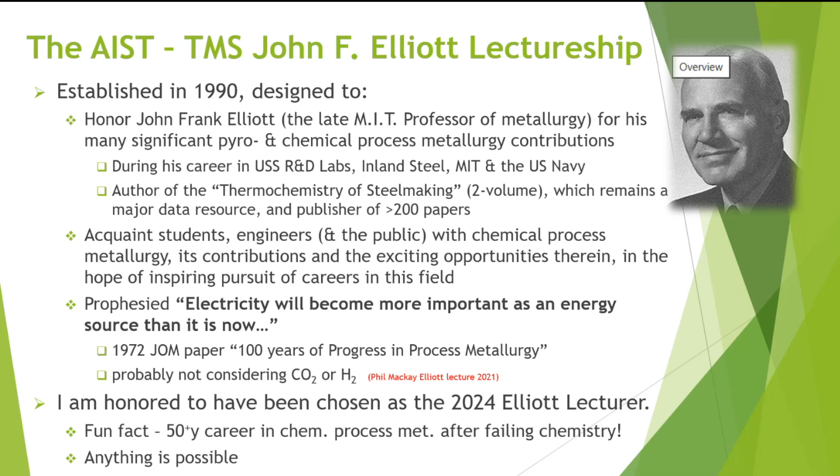So why the Green Steel Revolution? My definition is zero emissions steelmaking using fossil-free energy sources. And of course, the zero emissions ironmaking is the most crucial for the greenhouse gases, as I will show you. But at this point in time, it's not cost competitive with fossil-based.

So why the Green Steel Revolution? In 2015, the plan was to convert 800-year-old blast furnace BOF technology to the 60-year-old EAF technology and make some major changes in the modus operandi there. So carbon-free electricity, green carbon and consumables, and hydrogen direct reduced iron as a charge material.

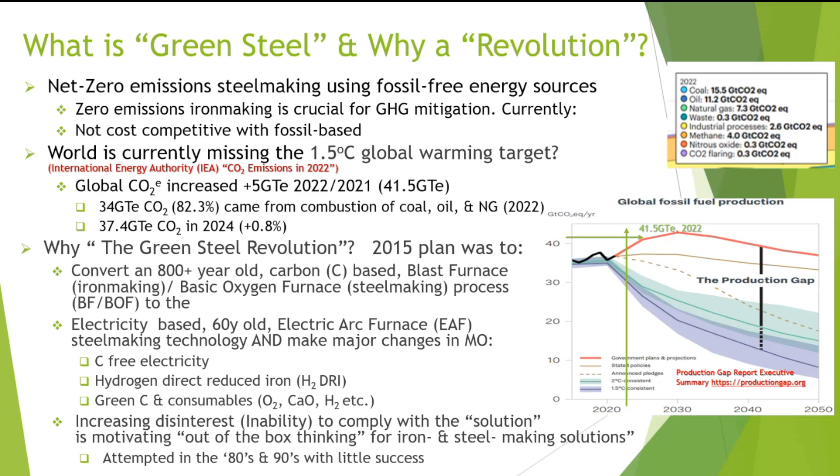But as everyone's seen, there's increasing disinterest or inability to comply with this solution. And it's motivating out-of-the-box thinking and new iron and steelmaking research. But it's valuable to note that in 1980 through 90, there was a lot of work done on this with little success. I'm not going through these, but just to demonstrate blast furnace smelting, reduction, direct reduction, and scrap recycling.

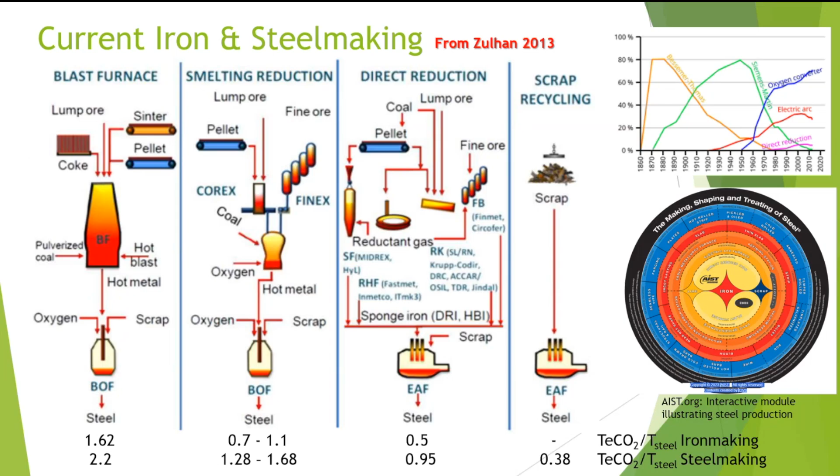Carbon dependence in both the processes shown here. I'm not going through all the calculations, but obviously with the blast furnace, currently there's no opportunity to completely replace the coke used. In the electric furnace, we have carbon used for chemical energy and foamy slag reactions. And of course, foamy slag has become very significant in processing over the years because of the reduction in heat loss, increased chemical activity, and the yield and productivity effects from it.

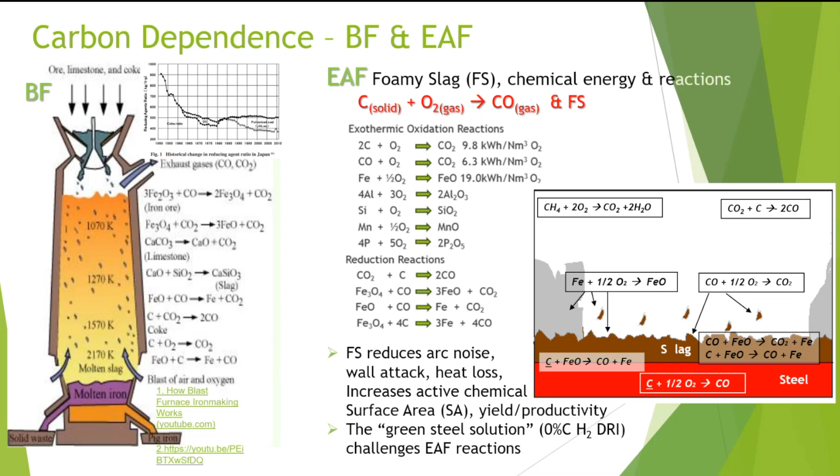And India is the second largest at 57% EAF steelmaking. And strangely enough, the USA is one of the largest emitters, but not specifically from the steel industry, because we are about 74% EAF steelmaking now. Fun fact, Canadian fires were the fourth largest emitter in 2023, emitting 647 million tons of CO2.

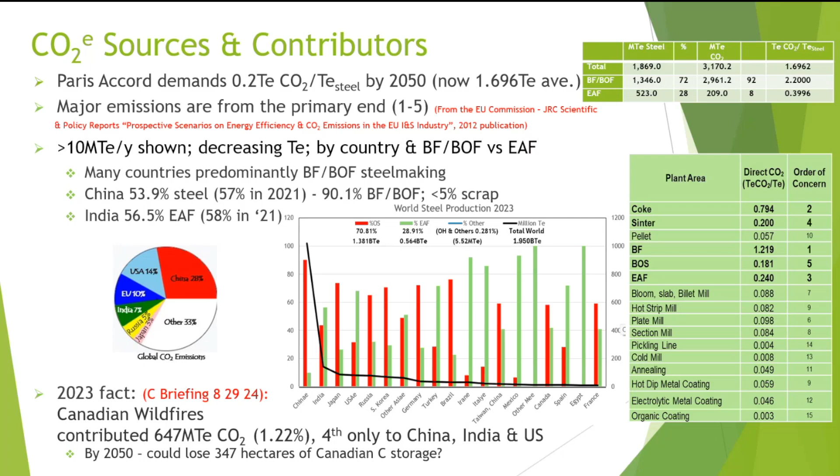So if we look at the International Energy Authority's vision and green challenges, of which there are 9, technically the 95% hydrogen DRI EAFs they expect to have online by 2070 are technically feasible, but there are major challenges which I will go through. The challenges are promoting research, which are from lab scale TRL3 up to demonstration plants at 7, some of which have become viable in less than 3 or 4 years. It is the most exciting era since the 60s when continuous casting was developed.

And the first of the 9 challenges is what I call the build rates. I believe they're unreachable. The future is predicated on the ability of hydrogen, energy, carbon, and better qualified scrap being available. And if you look at the numbers, in the 50 years since DRI began, there was only 2 million tons a year of DRI plants built as an average.

By 2050, IEA is projecting we'll need 411 million tons of DRI, of which 213 million will be hydrogen-based. And that's going to require 11.5 million tons of hydrogen per year, 692 terawatts, 1,240 20-megawatt PEMs, and 810 electric arc furnaces. And that's an enormous number of plants to be built to comply.

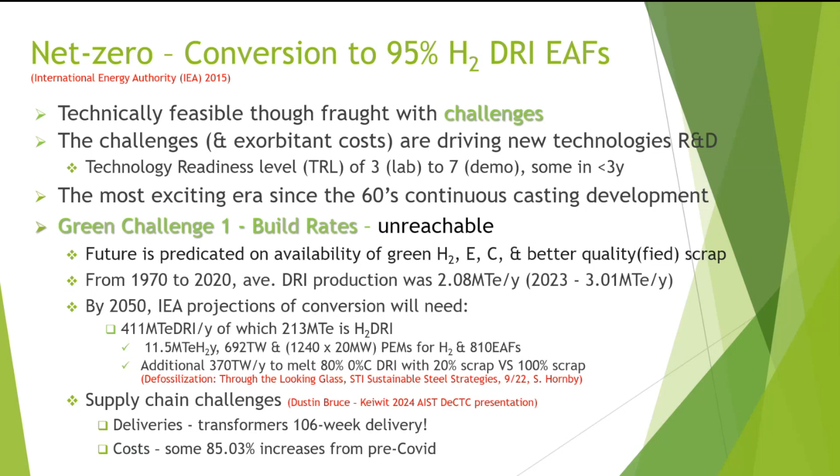Additional to that, as I will show you, zero carbon DRI that's produced with hydrogen, even if you look at the 80-20 running of DRI with scrap, is going to require 370 additional terawatts for melting. And we've got supply chain challenges now, which have occurred since COVID. Transformer deliveries are 106 weeks, for example, and some of the costs are up 85 to 100% now.

Another issue with hydrogen is the production efficiency. Currently, the processes that are out there require between 27 and 65% more energy than the basic 39 kilowatt-hours per kilogram of hydrogen. There are some projects ongoing. There's a plasmalysis jet loop ammonia stripping process that says they will be able to do 8 kilowatt-hours per kilogram, and they're taking that from wastewater and manure.

There's a next process in Australia with RMIT, and they're integrating sound waves with the existing electrolyzer processes and getting 14 times the production rate. And there's another company called Utility that's got H2Gen, and their hydrogen production is coming from water, but they're using blast furnace gases as the heat rather than electrical energy. They're using it as an electrochemical heat source to allow the hydrogen production. And they're able to concentrate the CO2 more efficiently for use elsewhere.

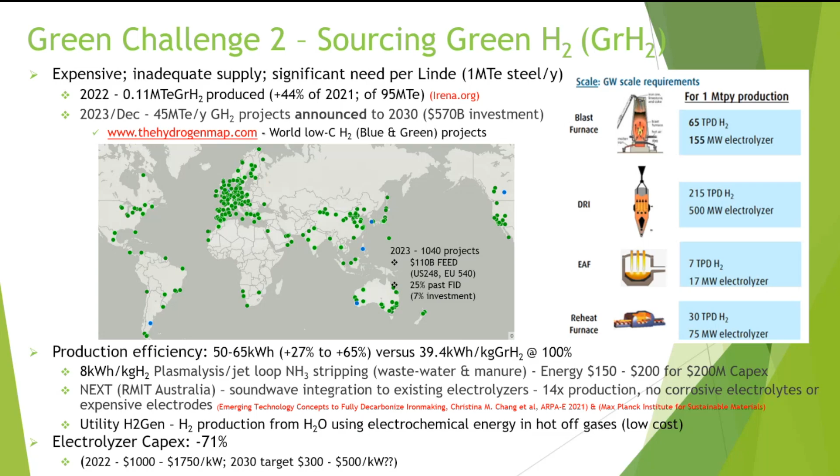We basically have not enough renewable energy at the right price. We need a drop of at least 50%, and even more in some areas in the world. Renewable energy in 2022 was 29%, which was an increase of only 1%. China is leading the way.

Capacity adds in 2023 were 0.5 terawatt and 0.6 in 2024. And if you look at energy use being 67% efficient, to produce 500 million tons of hydrogen is going to need 19% of the total world energy requirements. Hydrogen was anticipated to be an energy source in general for the future, but now only 2 to 3% is going to be used by 2050.

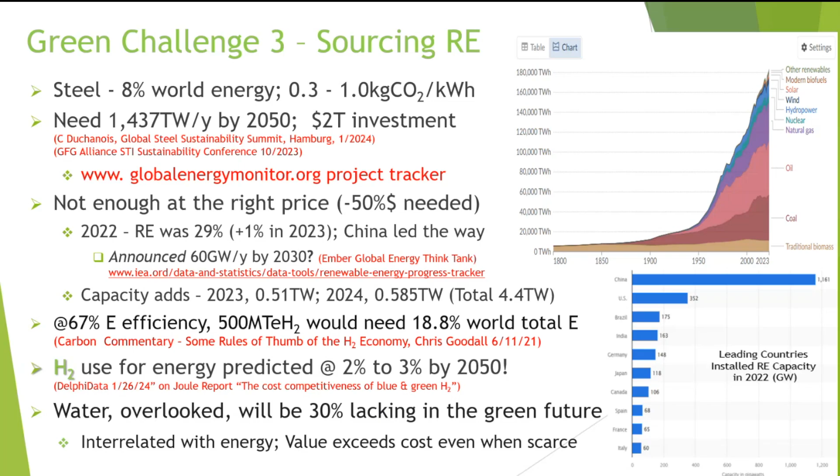Challenge number 4 is sourcing carbon. Historically, we produced iron by a renewable process, but in the 20th century we went to electricity and coal, but when energy became 20% of the OPEX, it forced minimization. There's some numbers there of how the best run furnaces and systems operate.

Obviously, blast furnace coke currently can't be replaced because they need it for bed support. Kobe Steel has the record at 239 kilograms per ton of hot metal. And one of the other issues is replacing the carbon in an EAF. Currently, the average is about 50% efficient, and I'm saying efficiency by combustion definition. If you're injecting, it's 50%. If you have it as an in situ carbon in either pig iron or DRI, it's 95% or more.

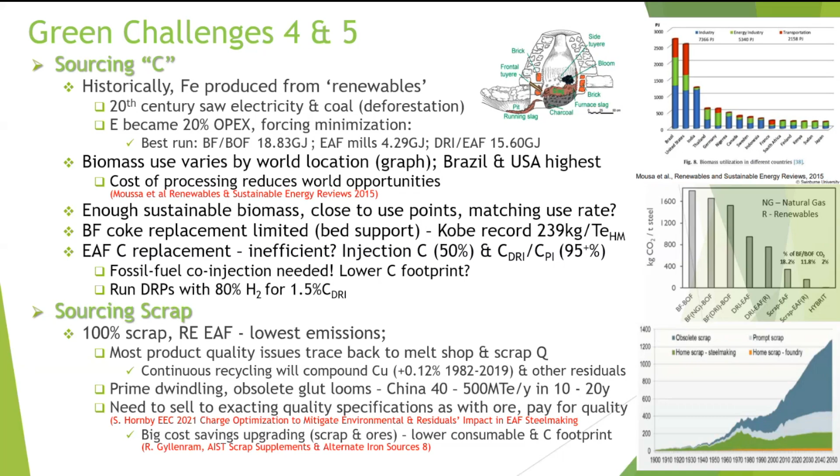The sixth challenge is the zero carbon hydrogen DRI in the EAF. You can see from the top chart that only 55% in this particular case has come from electricity. In terms of energy, 23% is coming from carbon oxidation. Carbon, as I said earlier, promotes the foamy slag. And with that comes stirring of the melt, increased heat transfer. And the carbon in the DRI currently reduces the FeO, both in the DRI and in the slag. And it also has the benefit of no ash, no volatiles.

If we have zero carbon in the DRI or inefficient carbon use, we're going to end up with increased cost and lower productivity because there's going to be more gangue in the system. We're going to have higher kilowatts, higher meltdown and tap times, higher refractory and electrode wear, lower yield, higher temperature and melt with the lower carbons, and more FeO in the slag.

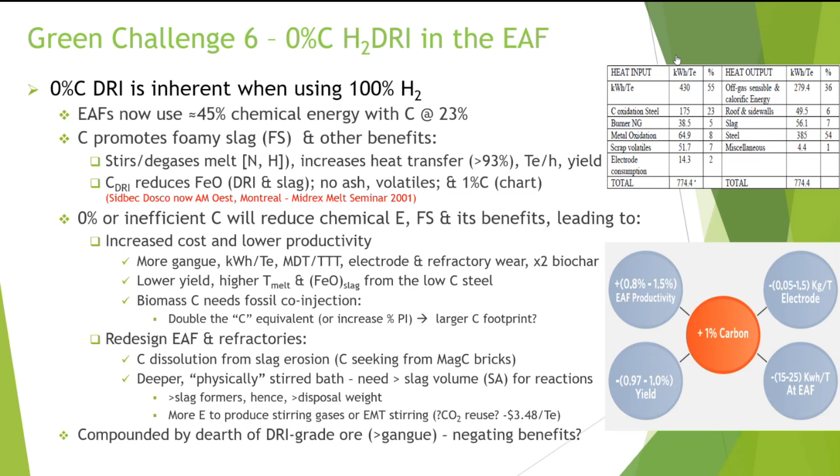So the seventh challenge is sourcing the DRI grade ore. And by that, I mean the DRI plants can basically handle any of the ore that's thrown at it. But to process that DRI in an EAF, we need to have more than 67% iron containing ore.

The quality of the ore around the world is deteriorating. We're already seeing a 2% drop in iron content. Silica and alumina are increasing by 2%, and the phosphorus increased by about 0.02%. 35% of the ore comes from Australia, and the Pilbara ores that they have there are difficult and costly to upgrade. They're doing a lot of work on it.

But currently the thought process is, and not just for Pilbara, but with the lower grade, weaker ores, that we redirect the DRI into a melter, so a submerged arc furnace, basically an ESF, and then put it to a BOF or an EAF as hot metal or as pig iron.

There's new technology for the lower grade ores. Electra is producing iron from 30 to 35% iron containing ores at 60 degrees centigrade, and that's being sponsored by Nucor. There's a process out of Australia I'll go into a little bit more later, which is producing DRI with hydrogen from fines. And Swinburne University in Australia, along with CSIRO, are working on this highly reducible flux lime magnetite pellet, and that's allowing the process to be basically constrained a little bit, and two process steps are being removed.

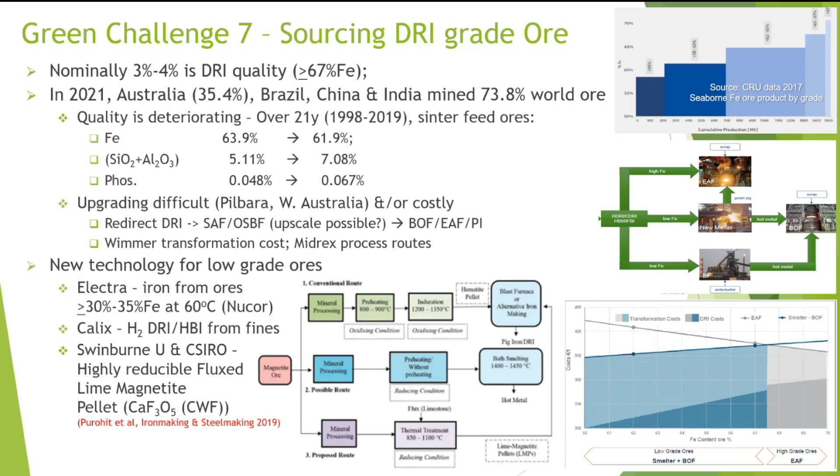Number 8 challenge is the availability of carbon capture use or storage. It's substantially below net zero requirements currently, and yes, it can address the 54% of the hard to abate emissions, but currently 35 plants in the world only capture 45 million tons of CO2, which is 0.12% of the world's requirements. And the new CCUs that were announced last year that should be operating by 2030 only increased that 0.6%.

So whilst they've been slated as a catch-all for solutions, there was an interesting article last year from Sandbag that says basically CCUs don't make sense economically, environmentally, or energy speaking. And they said that the effectiveness and relevance basically varies depending on the application. And they were suggesting it would be more appropriate for the Europeans that they were referring to to look at the direct reduction plants and other solutions rather than spending money on CCU research.

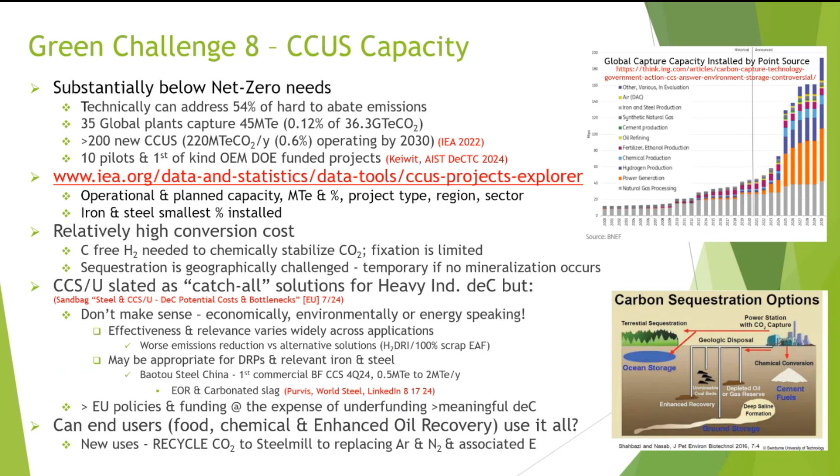The numbers here were taken from May last year, but the USA was producing hot band at 839, Western Europe at 680. The world export number was 580 and China was at 448. So it's necessary, of course, to levy border and import or black steel taxes to non-compliant nations as we move forward. And basically, the predicted carbon tax in Europe, unfortunately, is stipulating that financially the carbon tax needs to be over $300 per ton before it becomes financially viable to consider moving forward with a huge green steel conversion.

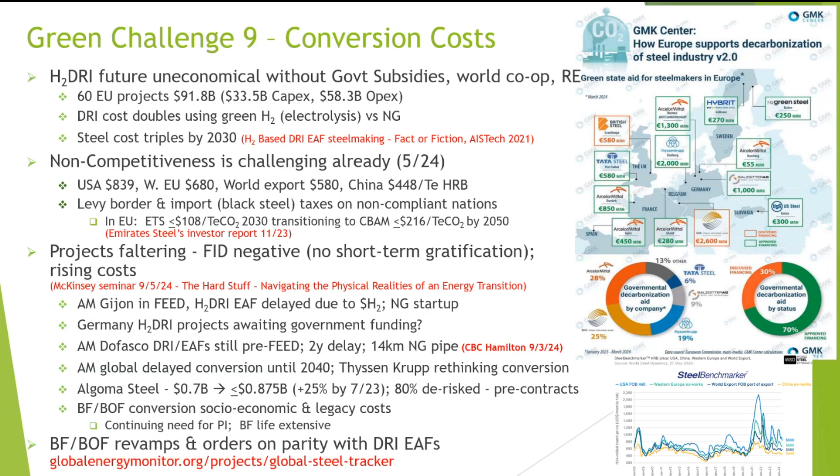Projects are faltering. The final investment decisions are negative in a lot of cases, I think basically because there's no short-term gratification. Costs are rising. There are some projects listed there that are delayed, and we all know that ArcelorMittal has delayed a lot of their projects by up to 10 years. Some of them have already been cancelled, and I'll show you a little bit later that the number of blast furnace operations is increasing significantly. So my thought is that we need to look at revamping the blast furnace BOF process and work on the ability to upgrade that as we move forward.

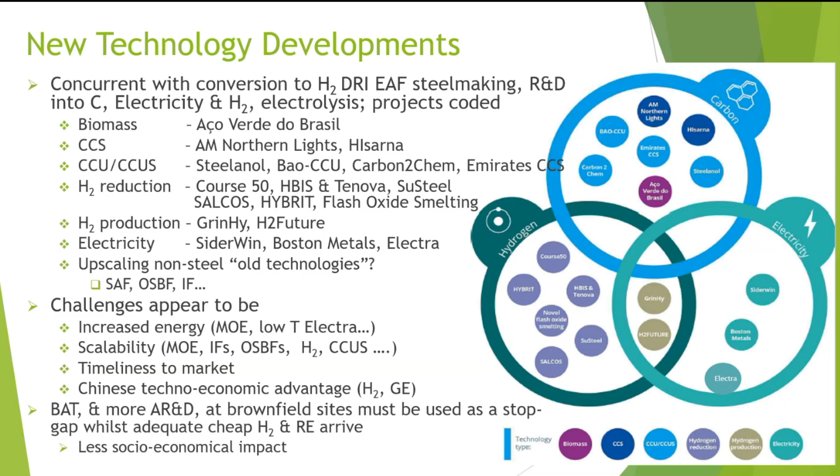So new technology developments, basically looking at biomass, CCUS, hydrogen reduction and production, electricity, and scaling what we call non-steel old technologies such as the SAF and the OSBFs. There are 3 processes in the world running with iron making, none of which are, I believe, running to full efficiency or capacity. Challenges for everything appear to be increased energy, scalability, timeliness to market, and the Chinese techno-economic advantages. So again, best available technology and more R&D at brownfield sites really should be a must moving forward as a stopgap.

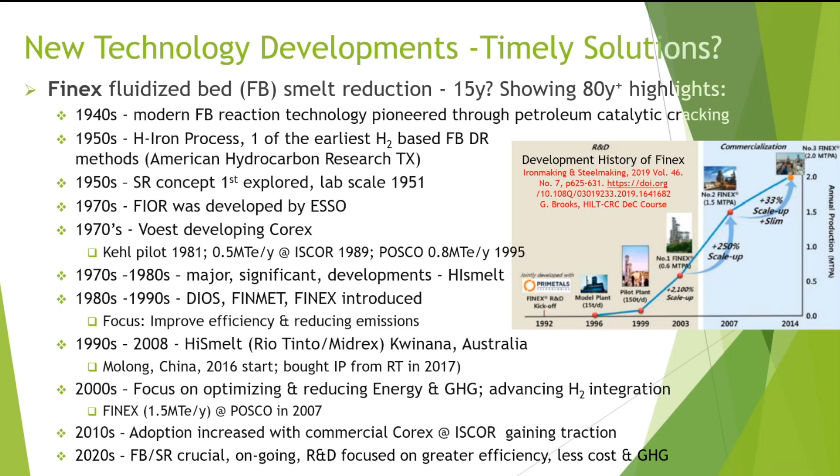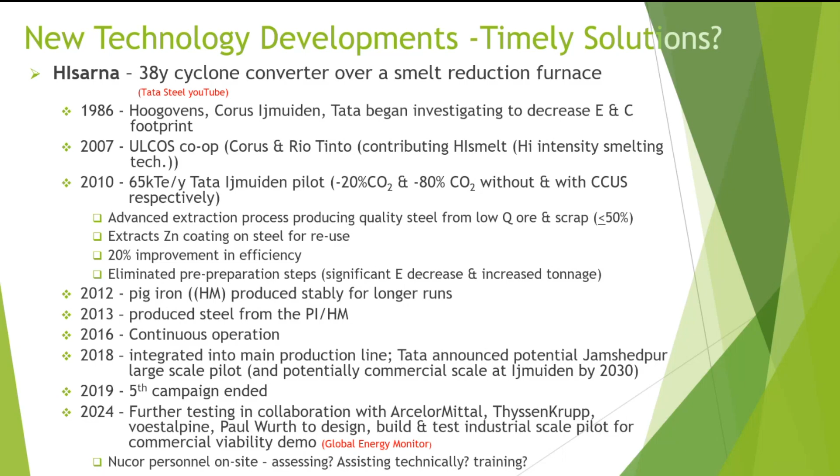Timely solutions, this is just an example I put out here. The blue area was the claim a few months ago saying we've developed Finex in 15 years. Well, if you look at the data, it's actually more than 80 years since they started working on that. And the second example I've got in here is HIsarna. This is a 38-year development of the cyclone converter with a smelt reduction furnace. Research is still going on.

So some of the new technologies: the electric smelting furnace is predicted to be capable of taking the excess lean ores and the unsuitable DRI. However, they need to upscale it. Currently, they're 1.1 and 1.4 million tons a year, whether they're circular or rectangular. But they need to optimize power intensity, sustainable renewable energy use, and the electrodes, which are currently carbon, and integration of that into a normal large plant won't be a problem.

BlueScope, BHP, and Rio Tinto are working on an ESF for the Pilbara ores. It's been announced, but they're doing the studies currently. And it should be noted, BlueScope's also relining their blast furnace. Rio Tinto has also got a bio-iron project ongoing, which is using microwaves. And GravitHy will be using IOC ores in France, and the agreement is that Rio Tinto will be marketing all the HBI that they produce.

Fortescue, Primetals, and voestalpine were supposed to be developing the prototype HYFOR. Fortescue has just pulled out of that process, and I believe that they've been replaced by BlueScope and potentially Rio. They've got a 1 ton an hour plant that's been running since 2016. And the 6 ton an hour demonstration plant will be put into Linz in Austria by 2027. The decision is going to be made fairly soon. It's been delayed since 2024.

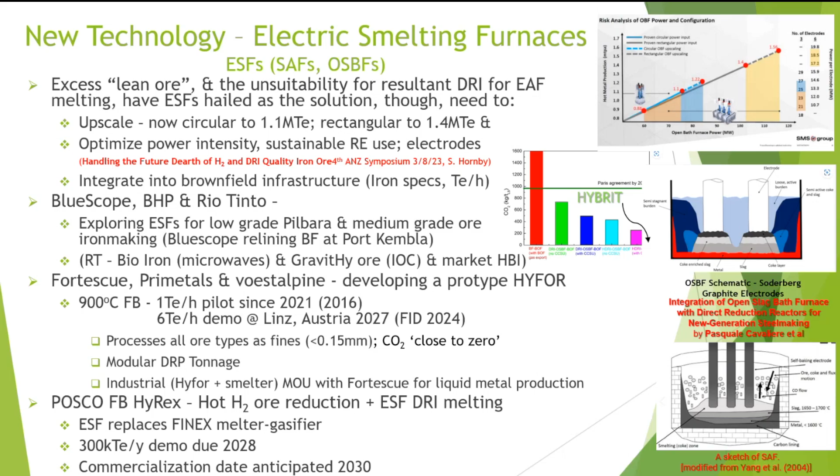The biomass zero iron making, as I already said, depends on where you are in the world. Brazil is the largest biomass and iron ore producer, using 88% renewable energy and charcoal in their blast furnaces. It's, again, a situation where you have to match availability with the requirements. And one of the big questions that's come up recently is the emissions life cycle analysis: with land use changed for harvesting and producing charcoal versus crops, is it economically viable? Also, the question becomes, is carbon neutrality actually achievable? Now, Redsmelt in Brazil is claiming that they can achieve zero emissions with a rotary hearth furnace and a smelt reduction furnace.

FerroSilva in Sweden is claiming that they can actually produce a sink of CO2, 0.845 tons, and they're going to make it using syngas derived from forestry and agricultural waste. They're going to send biochar to the steel mill, and they're going to capture the CO2 potentially for fossil-free ship fuel and biomethanol production. So they're currently in the pre-study phase, and they're looking at a 50,000 ton a year DRI plant in Ovako, Hofors in Sweden. And the process diagram is at the bottom right-hand side there.

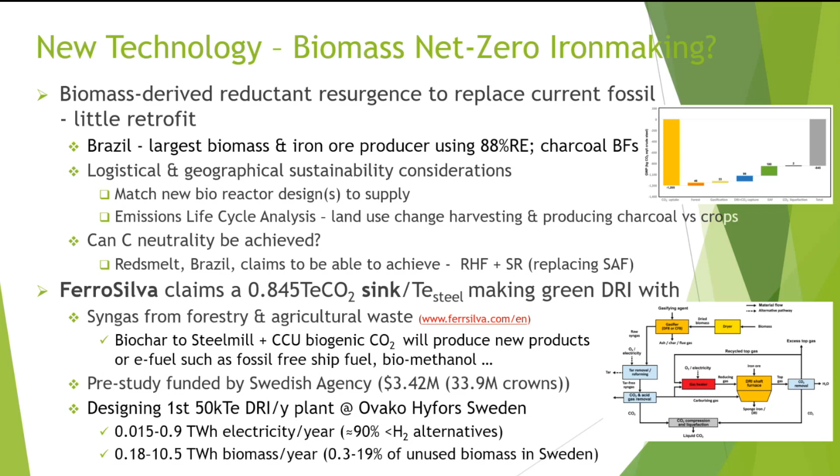Solid DRI process: Calix is a new Australian company that's actually, it says 2.5, but it's 3.5 years now since inception. They've proven the ability to produce green iron from the Pilbara ores. Metallization is anywhere up to 98%, but not with all of the ores yet. They're using green hydrogen on two concentric tubes, basically. Green hydrogen on the inside tube with the countercurrent to the ore fines, and renewable energy in the outside column. They're getting close to stoichiometric hydrogen use.

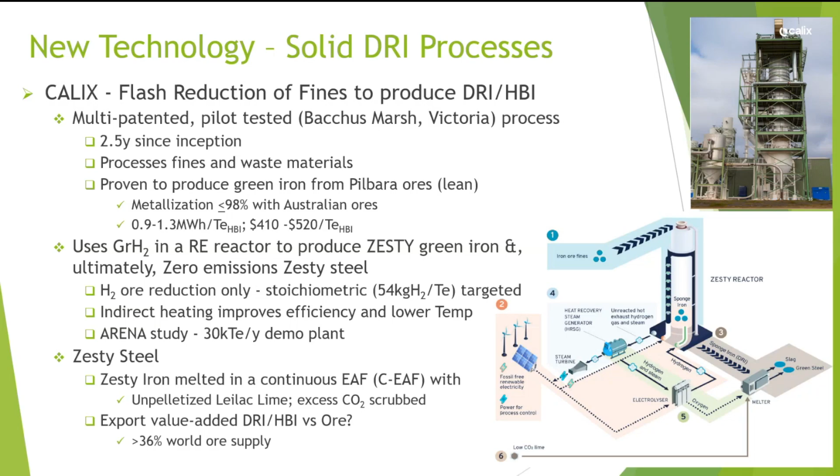They're doing an ARENA study, or requesting an ARENA study right now, for a 30,000 ton a year plant, where they will actually increase the height of the tubes to give them longer residence time for the more lean ores that will technically reach the 90+% metallization. And they have a process ongoing with their zero CO2 lime process, which is how this all started. They were producing zero CO2 lime. And they will combine all of that to put the ZESTY steel process together.

Amazingly, the solid DRI processes only show TRL 6 to 8. I'm assuming it's because of the HYBRIT hydrogen process, and also the open question of whether we should maintain carbon in the DRI or not. HYBRIT, of course, has run at a ton an hour of DRI with full hydrogen. They've proved this lined rock storage that they require for the hydrogen to function. And they've proved 100 cubic meters, and they'll need 120,000 cubic meters for the new plant that's going into Gällivare, which will be a 1.3 million ton a year renewable energy H2 DRI EAF steelmaking plant that should be running by next year. There's also a hydrogen rotary kiln that's running on solar and wind.

There's a 0.5 ton HyIron DRI plant in Germany running on 14 megawatts of renewable energy. And this HyIron is going to do a joint venture with Hyron, or has actually, because they've just produced the first iron in Namibia. 15,000 ton a year to start with, running on 20 megawatts of solar. And they will ultimately meet the 2 million ton a year DRI by an additional 18 megawatts of wind and 140 megawatts of solar.

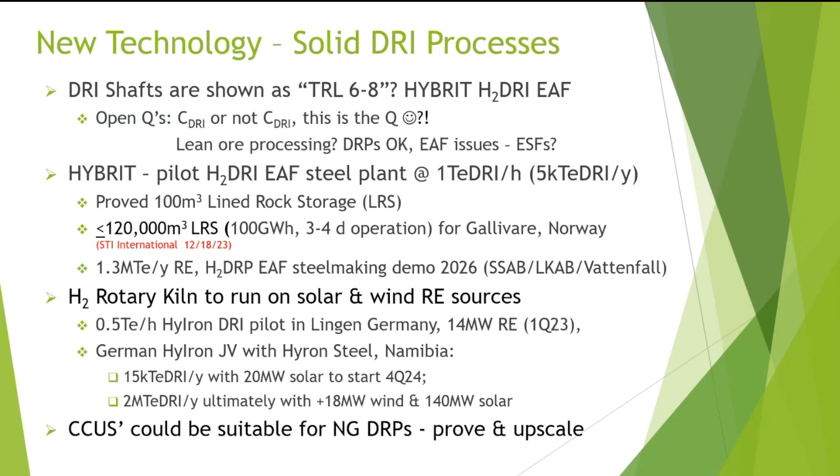Electrolytic iron making. Obviously, electrowinning can be either high temperature at 1500 degrees C or low temperature at about 110 or less. The redox reaction is iron at cathode, oxygen at the anodes, and the actual oxide anions in the ore are the reducing agents. Higher efficiency because the renewable energy is direct contact. The high temperature process dissolves the ores in the molten electrolyte, giving liquid iron. Faster kinetics, but higher capex and opex. ArcelorMittal et al. explored this, MOE, which came from the ULCOS work that was done. And they were looking at it between 2004 and 2012, but I don't think it has moved forward.

The low temperature solid iron process is, of course, lower energy use, and lower capex and opex, but it's a slower reaction rate. And ArcelorMittal does have their Siderwin demonstration project running, which is a 110-degree aqueous process in batch to produce iron plates. The American equivalent is Boston Metal, which is high temperature. It can process a wide range of ores, but it's limited in productivity per cell because of the current density in Faraday's law. The critical factors for them are ability to recarburize once they've got the iron, longevity of the anode and choice of the anode, and scaling.

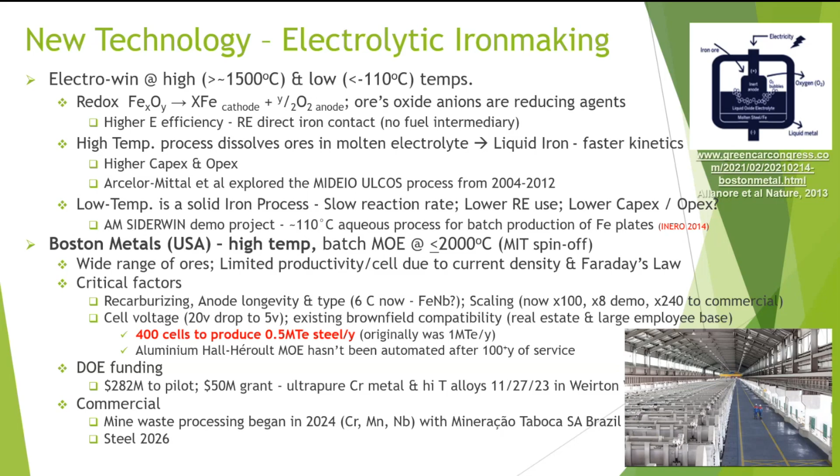Some other electrolytic processes. Electra in Texas is sponsored by Bill Gates and Amazon. It also has been up and running for less than 4 years. It's a low temperature process, and it's converting 55% iron ores to 99 plus. It's electrochemical and hydrometallurgical. It's creating 1 square meter of blocks, but we don't know how thick. And that will go straight to an electric arc furnace with virtually no tramp elements.

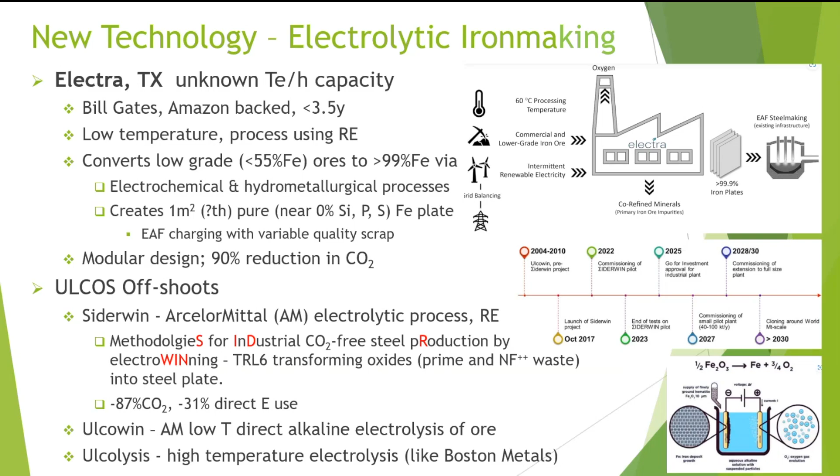And there's also the ULCOS offshoots. I already mentioned Siderwin, that's being run by ArcelorMittal. There's Ulcowin, which is ArcelorMittal's low temperature direct alkaline electrolysis, and Ulcolysis, which is the high temperature one that's equivalent to Boston Metal's.

Excuse me, plasma iron making has arisen again. Basically a plasma arc electrode to the ore in a conventional furnace. It's very energetic species of hydrogen that are created, which overcomes the endothermic nature. There are enhanced kinetics and energy savings, lower reaction temperature. There's a pilot demonstration at the University of Leoben with Voestalpine cooperating.

Historically, this has been overpriced for the industry and failed in the 80s and 90s. They need to find a lower capex. They need to find a new reactor design with a better efficiency than there was. And refractory life was a big issue when they originally brought this to the industry back then.

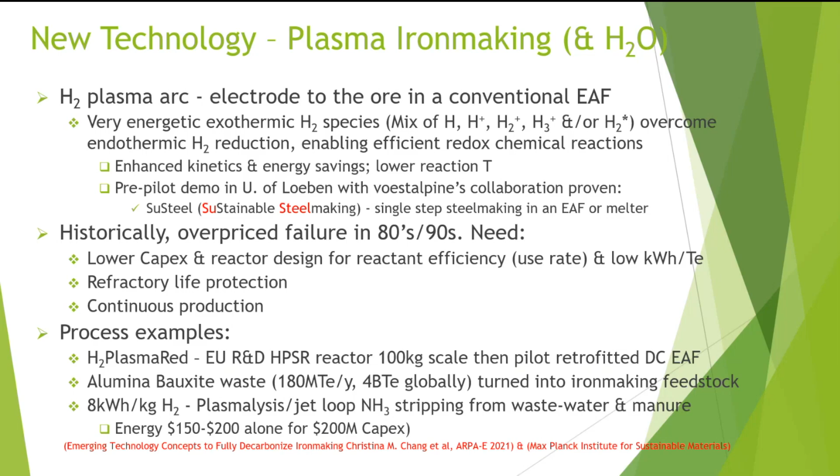There are some examples out there. There's a hydrogen plasma reduction research in Europe, which is 100 kilogram scale currently. If it works, it's going to be retrofitted to a DC arc furnace. There's a potential for the aluminum bauxite waste, which could be 180 million tons a year turned into iron-making feedstock. And I already mentioned this plasmolysis to strip ammonia from wastewater and manure.

So if we look at the opportunities on the brownfield decarbonization side, blast furnaces obviously would be the prime objective. We're still looking at 50% of the world's iron coming from blast furnaces in 2050. So we need to do something about those that remain. It is the greatest potential for CO2 reduction. Improving measurements in the mill would be the start. Blast furnace pellets, we already know, reduce the CO2 by 85% compared to sinter.

We need to intensify metallics use in the blast furnace, either scrap or HBI. The IIMA, the International Iron Metallics Association, showed an 8% productivity increase and a 7% coke reduction for every 10% metallization that was put in the blast furnace. And US Steel actually showed this back in the 80s when they were putting metallics into the furnace. Biochar substitution, of course, for coke and pulverized coal injection. Hydrogen or methane tuyere injection.

It's shown that 115 kilograms of natural gas has basically reduced CO2 9% versus coke alone. And Hatch has predicted that if you use PCI, 35 kilograms of 900-degree hydrogen, you can get 20% reduction in CO2 and an additional 35% of energy to the steel mill, but it's going to cost a lot, even though there's 100 kilograms of coke reduction.

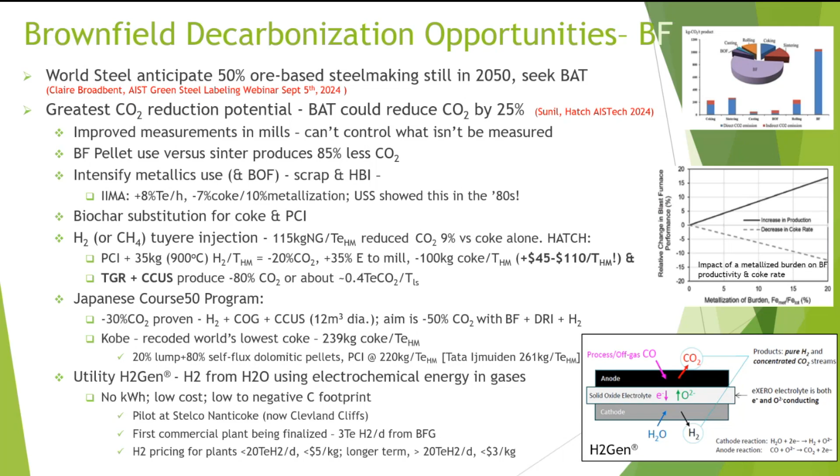Its first commercial plant is going in at 3 tons of hydrogen a day from blast furnace gas, and the hydrogen pricing is interesting. Less than 20 tons a day of hydrogen would be less than $5 a kilogram, but if you get bigger than that, it's going to be way less than $3 per kilogram. In fact, they were talking more like 1.5 to 2, which is perfect for the industry.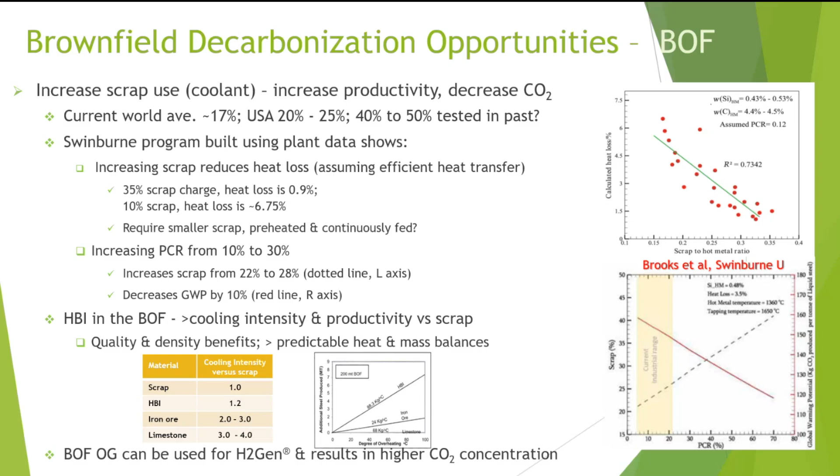Beneficiating the scrap is a need. And I know that a lot of work's been done in England proving this. And we need to beneficiate the scrap to reduce the amount of ore-based metallics that we actually need. Shredding in-house, improving the quality and density and the yield, and also the profitability from the fluff from the shredder. It can be sold at quite a good price.

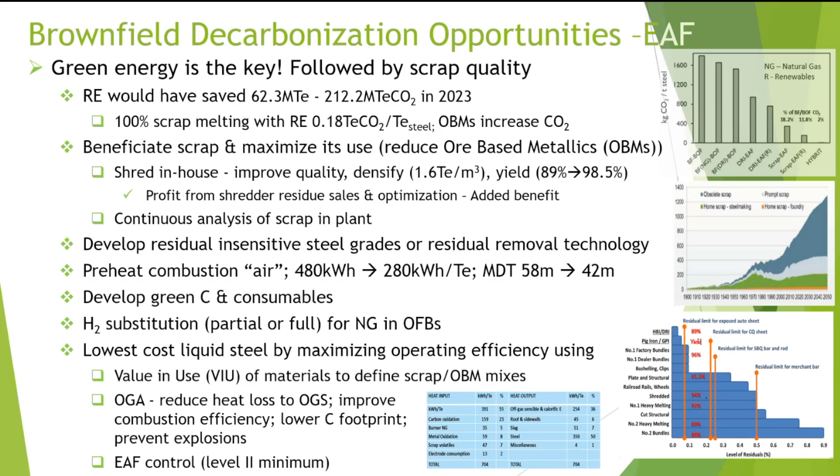But also for the lowest cost liquid steel, we need to maximize our operating efficiency. And to do that, I think we need value in use programs, off-gas analysis to reduce the heat loss to the off-gas system. And we need EAF control. I worked in a plant last year that had all the tools, but they only had level 1 running, and it caused a lot of issues for control.

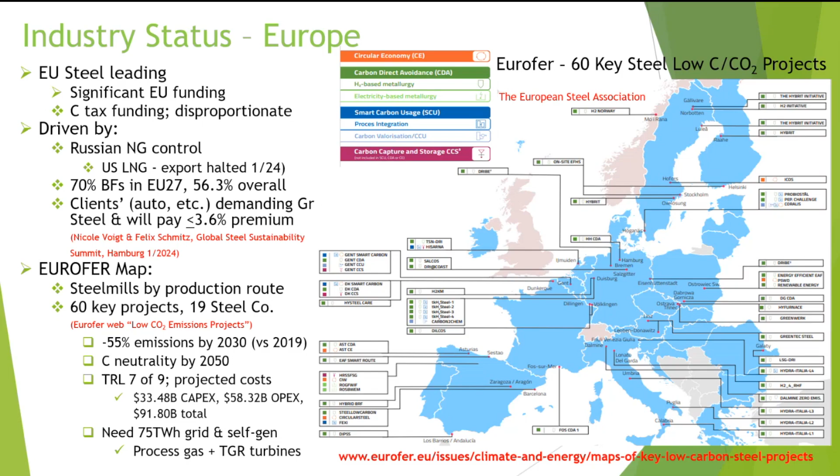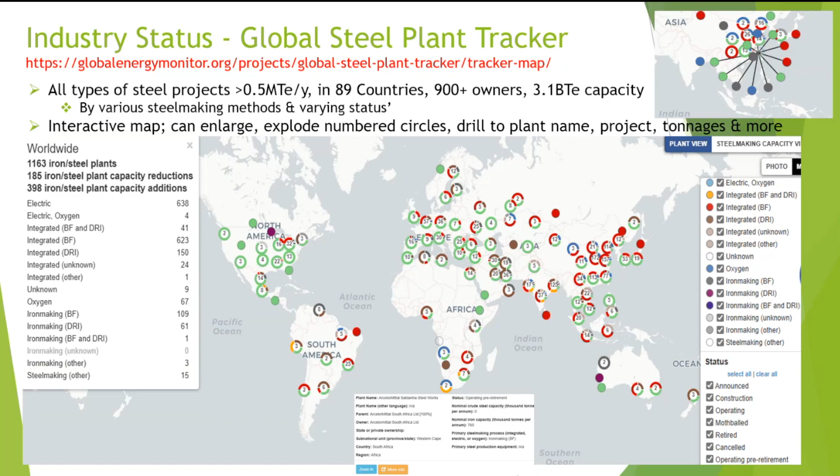And then it categorizes them by announced, construction, operating, mothballed, retired, cancelled, and operating. And if you take one of the circles that's got a number inside it and explode it, top right, it will color code all of the plants in that particular circle and explain what process it is. And if you drill down further, as I did with Saldanha Steel at the bottom of Africa, you can get all the plant data, and even after you get the general plant data, you can drill down even further on each of these processes. But for time, I just summarized the tracker.

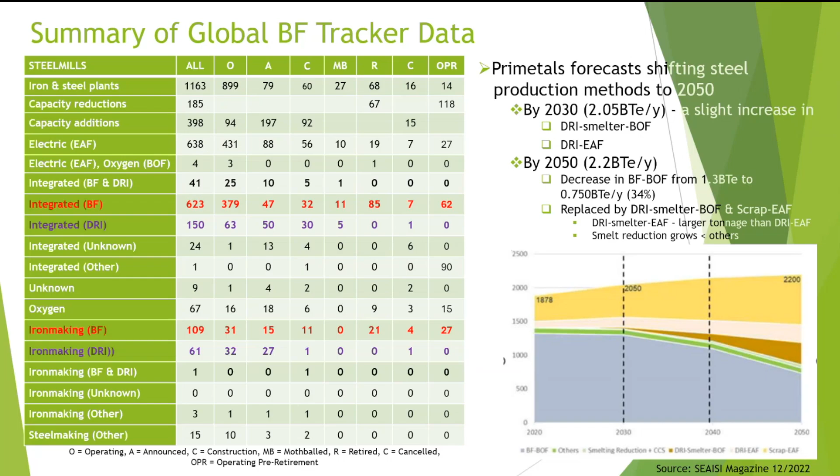And in fact, on the construction side, there are more blast furnaces than iron making DRI plants going in. And the integrated plants are about equivalent. So there's been a big change recently. International solution is potentially decoupling of the iron and steel making. The solutions are going to vary by location.

China's got very young blast furnaces and aren't likely to shut them all down and put electric furnaces in a hurry. India's got low tons of scrap, so they're going to continue with their DRI production. Their infrastructure's a little bit lacking, but they are growing significantly in tonnage. The renewable energy sources vary considerably. China's ahead in the world, of course.

MENA, with their solar, they're putting in a Midrex Flex DRI in Algeria and Libya, and they're going to put in 8.1 million tons of DRI, 2.7 of which will be the first phase. And there's a lot of international alliances going on. Germany sponsoring Colombia's efforts, Rio Tinto supplying IOC pellets to GravitHy and taking back the green iron to sell.

CCU scale up, of course, as everyone's saying, is vastly overestimated for the Chinese, Indian, and South Korean deployment, which is an issue because they're the biggest polluters in the world. But this seriously needs to be thought about. Australia is doing a lot of thinking about renewable energy and how they can produce iron or HBI for sale, as opposed to selling their low-grade ores.

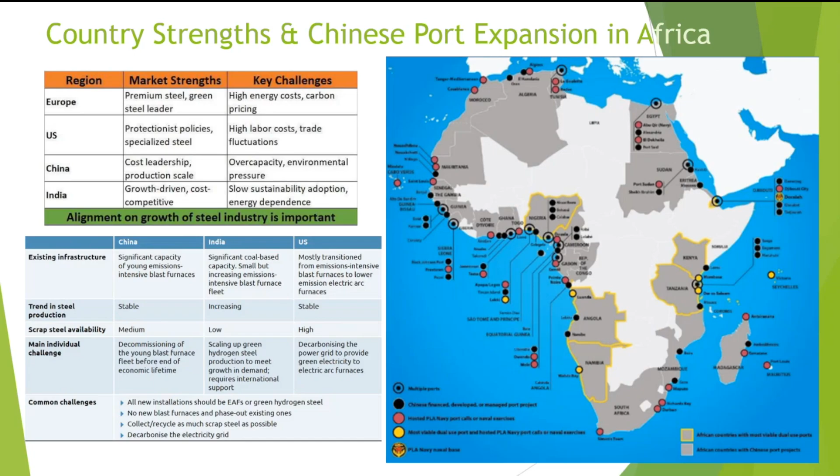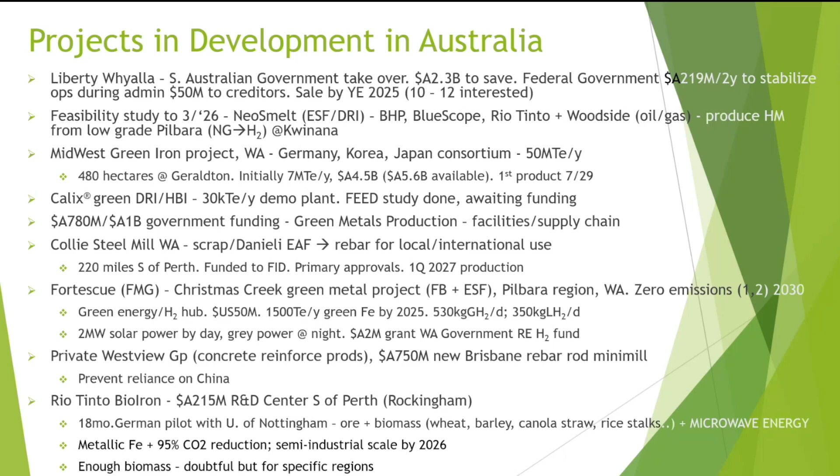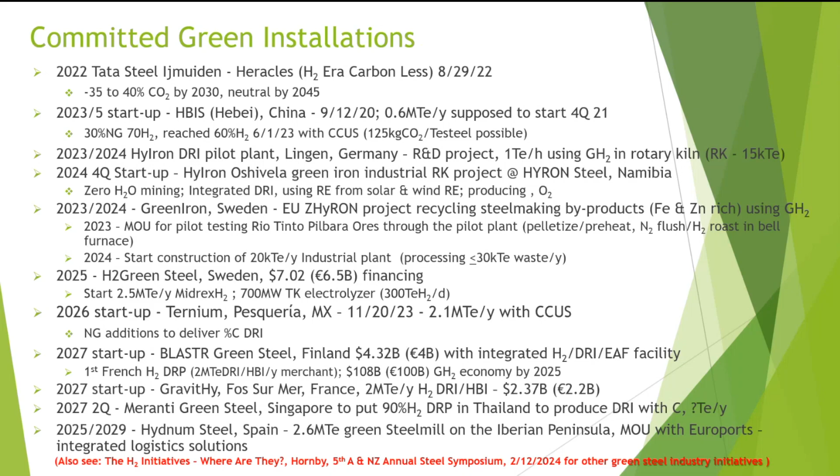Committed green installations, predominantly Europe, are here. Again, these are the ones that are going ahead, not the ones that were announced. So basically, in summary, the scale of progress and investment falls significantly short of the 1.5 degrees centigrade goal that's needed for the greening of the future.

Hydrogen DRI EAF steelmaking is technically viable, but challenged with huge issues moving forward, the biggest of which is conversion costs. And we also have a catch-22 because suppliers of low or green carbon energy and hydrogen are requiring guarantees of purchase, and the steel industry wants guarantees of supply at the right price. So that's a big issue.

Decoupling of iron and steel making is, I think, going to happen. So ore with iron making, and the renewable energy and steel making. In the meantime, we need to heavily tax the black steel, the non-compliant nations, to force them into looking at greening their situation. And we need to look at the best available technology for the brownfield sites that we currently are operating.

So the green steel revolution spawned innovation and new technologies, but the question remains, can we innovate to market quickly enough? Can we actually use CCUs to fix the problem we're going to have for steel ultimately? And whether we can produce hydrogen efficiently and the costs can be improved significantly. And really, there's a huge opportunity for careers in the industry, especially for those willing to think outside the box that have had little industry experience and aren't, let's say, blinkered in the way of doing things of old.

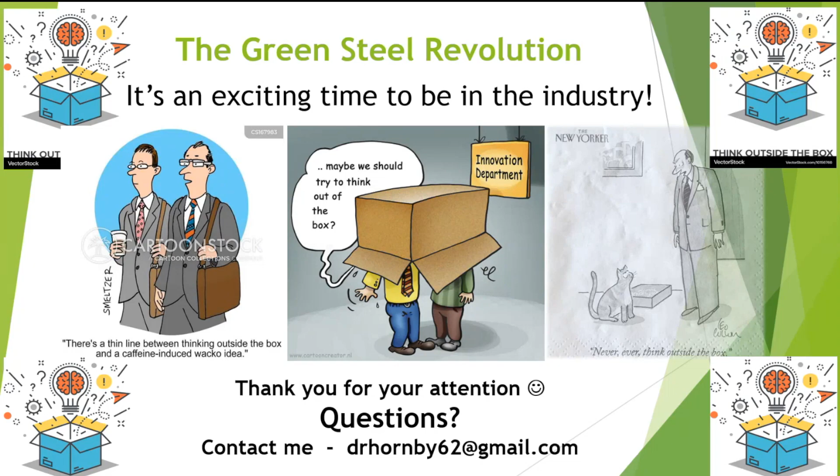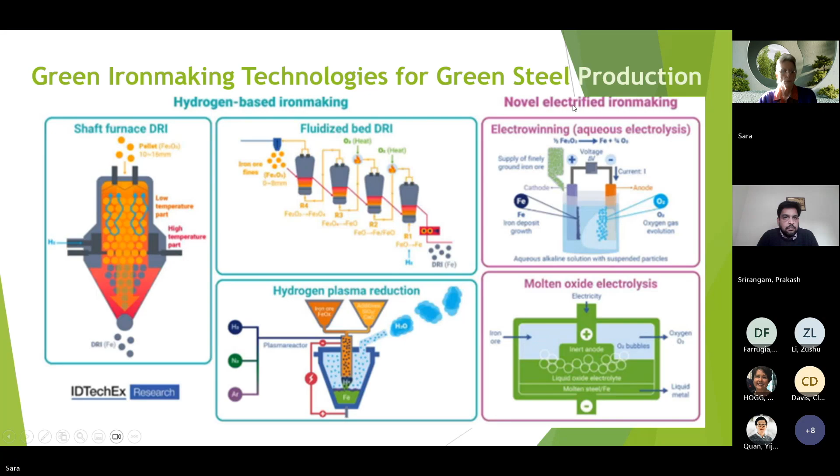This is a chart that I was mentioning about the steel that's changed in the industry. So there's quite a lot of information there, and it's all now coded as to how.

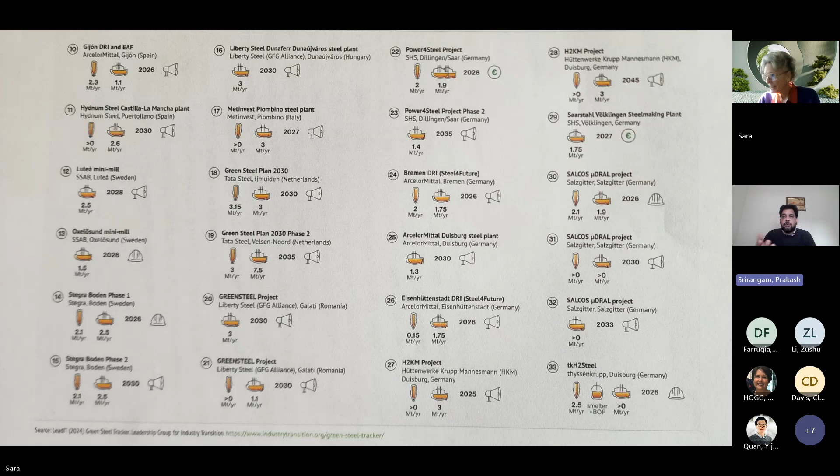Zushu, please. I'm sorry? No, Zushu has a question, I think. Hi, Sara. Okay. Thank you. Hi, Sara, can you hear me? Yeah, I can now. Yes. Okay, I can't see you much, but I can hear you.

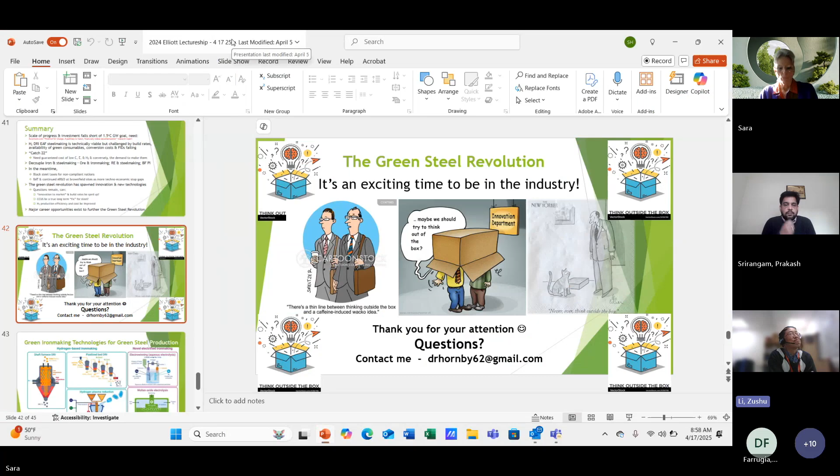Thank you for the wonderful talk. I think this is the first talk I have seen with so much complete data and information about the topic. So that's the question I wanted to ask your view on. I know you still pay quite a lot of attention to the UK steel industry. I think you know the UK steel industry is going to switch to scrap-based EAF, but we do need probably, I would guess, around 1.5 million tons per year of OBMs.

From your point of view, do you think it makes sense to build an HDRI plant in the UK, or is it better to source from outside? Good question. From what I understand, the DRI plant people, well, the two majors, Tenova and Midrex, are now looking at building 2.5 million ton a year plants, period. They don't want to go smaller. They don't want to do demos, except the one that's going in with Hybrit.

It depends on your ore supply, power cost. I mean, you've got a huge issue with power costs in England. And I guess my question also to you would be, how are you going to make steel with the power costs the way they are? Will the government truly assist and lower the power costs for you? Because if not, you're not going to be competitive going to the EAF steelmaking route.

Yeah. Okay. I don't know the answer. I guess on the UK side, the steel industry or the steel community is examining which way is better. And also, you mentioned a good point. If we're running scrap based, completely based on EAF, the economic sense needs to be considered. Maybe we would like to invite you to give another talk to the UK steel community about how to make a profit running EAF production. I think that's probably quite a useful, important topic for the UK steel industry.

Yeah, as you know, I was hoping to come over in March and talk to the industry and different universities, but it turned out my US passport was within the 6 months and I really wasn't sure I would be allowed back in the country. Okay. But it really is a major topic, and I heard the discussion in Parliament the other day where Alan was telling them that he'd been in the steel industry for 25 years and they needed to listen to him. It was quite an interesting conversation.

And yeah, it's sad to see that when I was in England, we were a pretty good steelmaking community and could show the world, and now it's to the point where the question is whether the steel industry in England continues or not. And there is a real issue with the economics of making steel the way you are currently, in terms of the power.